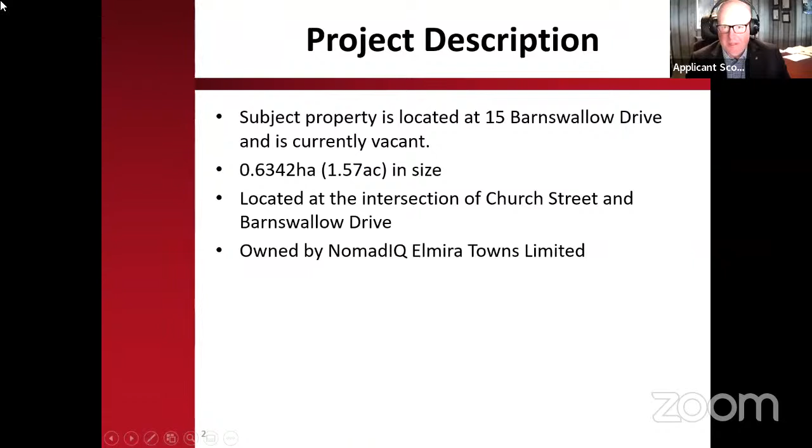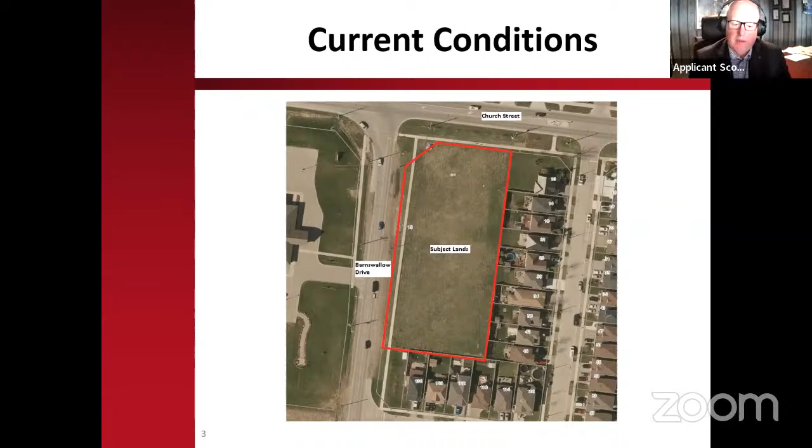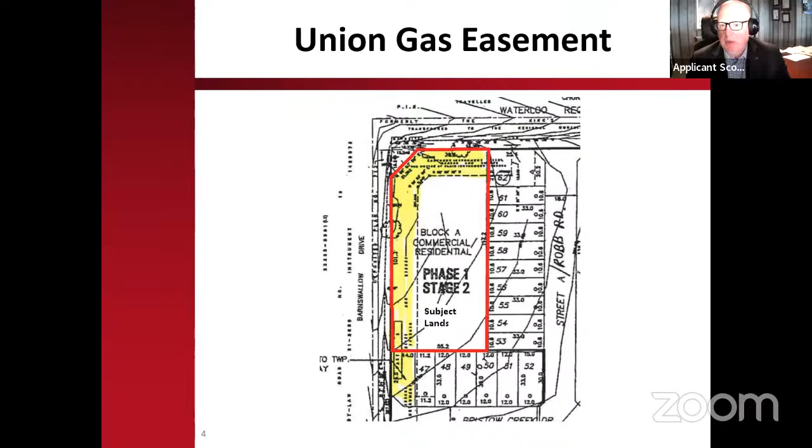Next slide, please. So again, the subject property is outlined in red. One of the biggest design considerations, or I'll call it an issue with this site, is the location of a Union Gas easement, shown in yellow on this image. It encompasses basically 50 feet of the property around the road perimeter of the site, able to put parking, driveway access, and things like that on top of the easement. But naturally, no building or permanent structure would be allowed in that area.

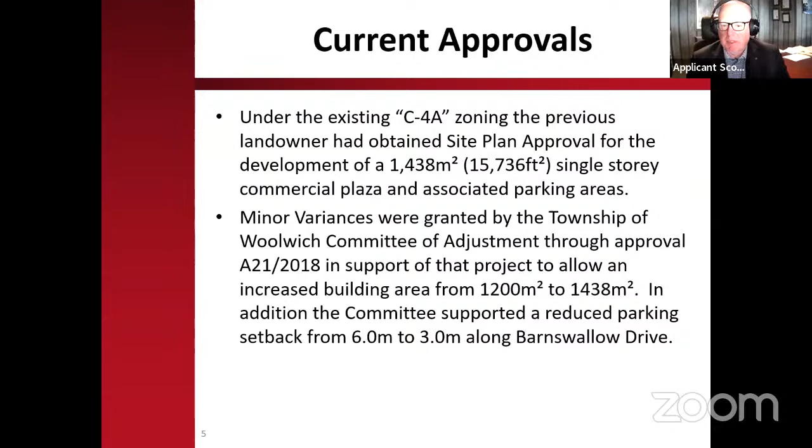Next slide, please. Under the existing C-4A zoning, the previous landowner had obtained site plan approval for the development of a 1,438 square meter single-story commercial plaza and associated parking areas. As part of that project, minor variances were granted by the Township Committee of Adjustment through approval A21/2018 in support of that project to allow an increased building area from 1,200 square meters to 1,438 square meters. In addition, the committee supported a reduced parking setback from 6 meters to 3 meters along Barnswallow Drive.

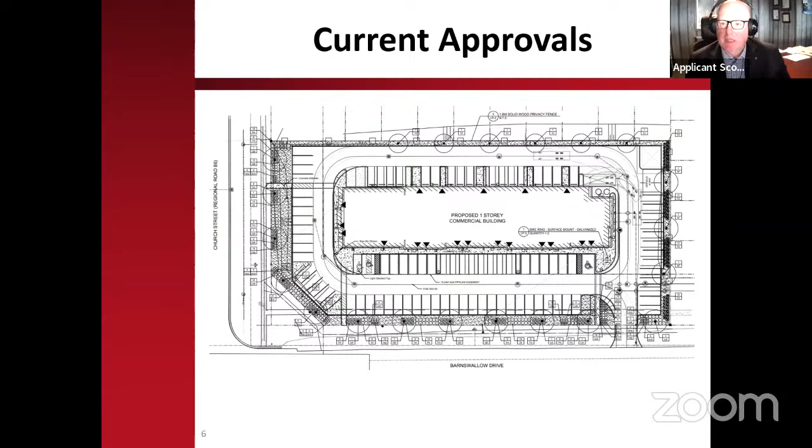As noted by Mr. Gundrum, there is permission in the existing zoning. Dwelling units are permitted above a commercial building under current zoning, so theoretically, meeting parking requirements, a second floor of dwelling units could have been added to this building. Next slide, please.

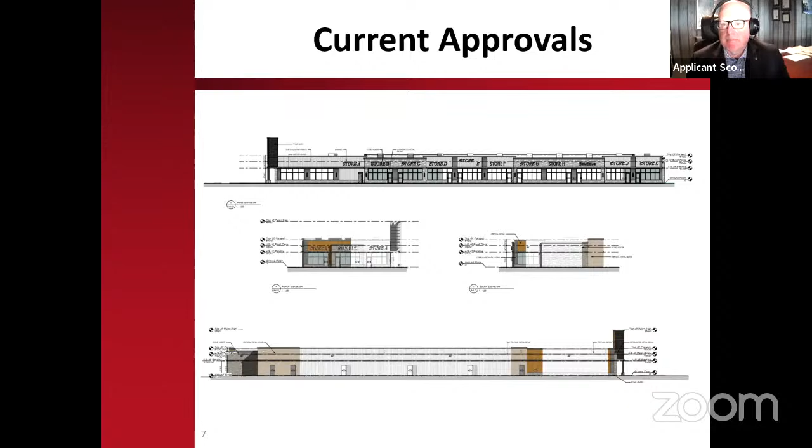As part of our proposal, an official plan amendment to permit an increased residential density from 60 to 81 units per hectare was submitted. The proposed residential complement of 51 units, being 45 stacked townhouses and 6 dwelling units, equates to a net residential density of 81 units per hectare.

Concurrently, a zoning bylaw amendment application to change the zoning from the C-4A with site-specific regulations to residential multiple design guidelines mixed-use R-7B zoning, again with site-specific regulations, was also applied for. This would facilitate the development of multiple and mixed-use buildings, and in particular permit standalone residential land uses in the form of stacked townhouses. Next slide, please.

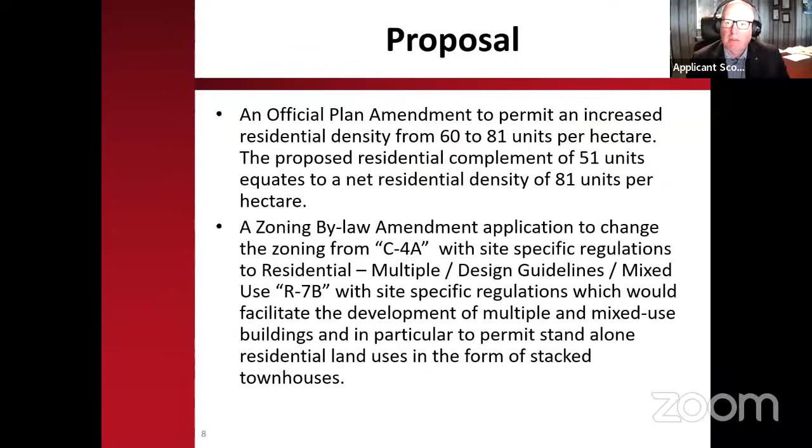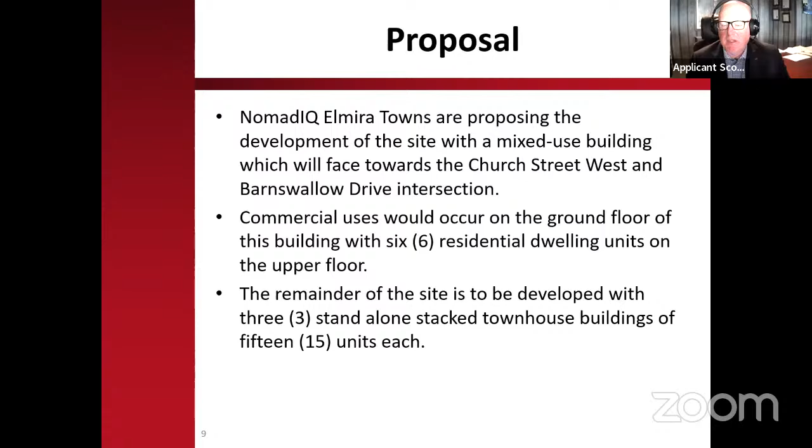NomadIQ Elmira Towns are proposing development of the site with a mixed-use building facing the Church Street West and Barnswallow Drive intersection. Commercial uses would occur on the ground floor, with 6 residential dwelling units on the upper floor. The remainder of the site is to be developed with 3 standalone stacked townhouse buildings of 15 units each. Next slide, please.

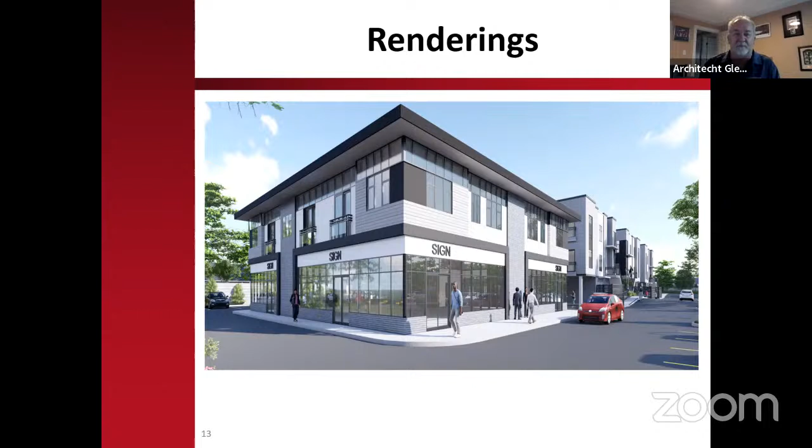So we are providing a clear demarcation, much different than what the previous proposal had with all sorts of horizontal commercial on it. Part of the reason for this is we're finding that the requirements for commercial establishments are getting fewer and fewer, especially with online buying and commercial establishments already being available within other pockets. So we're not going to completely disregard it, but we have reduced it so that we can still provide a facet of it within this development.

Next slide. So this is looking at the rear then—if kitty corner is on the far side, if you drive around the building, this is sort of from the back side. We do have a loading area underneath the building, which allows loading to be obscured from the street and allows the commercial developments on the ground floor level to be satisfied.

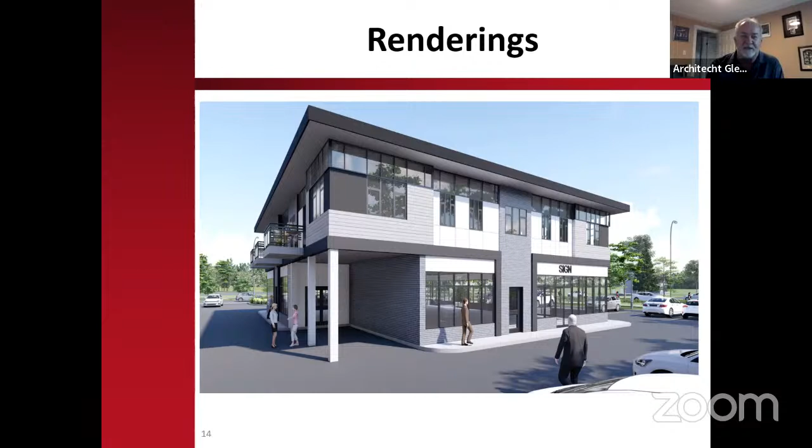Once again, sidewalks all the way around, perimeter parking all the way around. So the commercial establishment is on one side of the site with the mixed use residential above it.

Next slide, please. Now I'm taking you to the south end of the site, along Barnswallow. There is the whole driveway parking area that is running parallel with Barnswallow. This is the most southerly building, and this is showing the stacked townhouse.

Once again, the overall height of the building is not to exceed 10.5 meters. It is stacked, so each one of these blocks has 5 units per floor plate, 3 floors high, or 2.5 floors high, because the first floor is brought down in order to decrease the height value around the building and actually bank the berm into it. What we really want is a very walkable community where there's good social interaction between the sidewalks and the balconies and where people will be, so that it's an active community.

This was really inspired by the developers, who are looking for a live-work place where people can establish themselves out of the Kitchener-Waterloo area. They can work from home, have their own establishment, have commercial just down on the same site, but actually live and enjoy the environment. So even the unit designs have not only bedrooms, but actual working offices in them, because it's the live-work-play concept, which was very important to the developer on this site.

You can see that we've tucked the parking nice and easily off of the main access driveway, but it's tucked underneath the building so that we can reduce the interactions between pedestrian and vehicular traffic, and provide a nice living environment without having the cars within that environment.

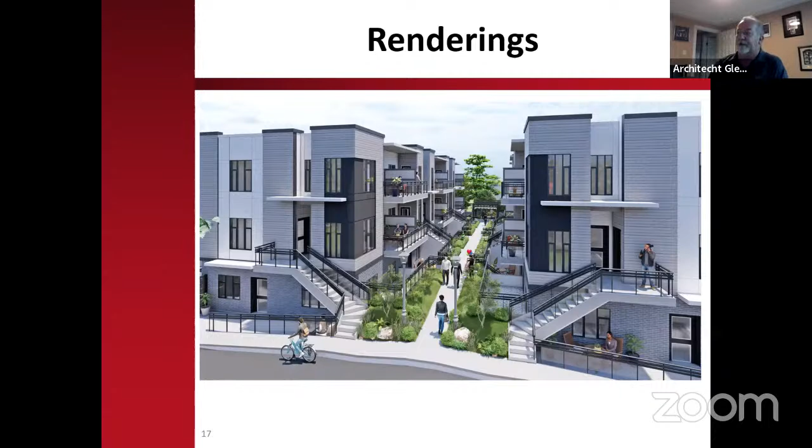Same elevation, pulling up a little bit more so you can see the extent of the walkways. The walkways run in between the buildings and back along the rear side of the buildings, giving a total walkable site around each residential unit, and once again providing people their own space on a balcony area or even ground-related.

This gives more of a pedestrian scale as you walk along in between that space. The units face into each other rather than looking over the neighbors, but inwards towards themselves. That's really been the focus in designing this residential development, which is supporting the commercial on the corner.

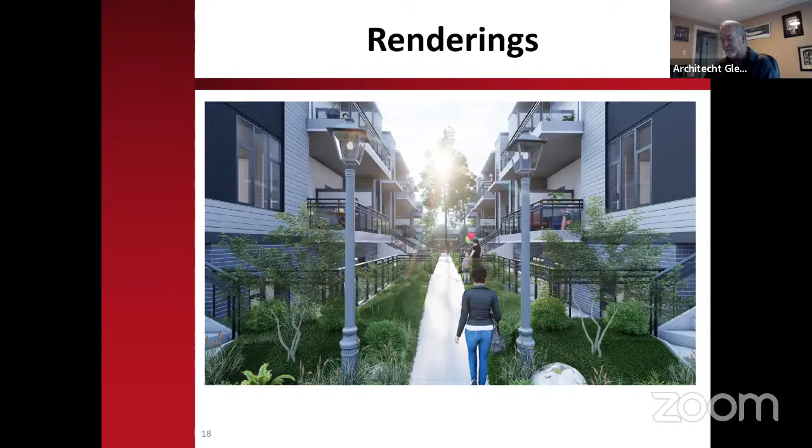That was the last slide. Yes, that leaves it back to you, Scott. Thank you, Glenn.

With regard to the applicable policies, regulations, and legislation, the proposal is consistent with the Provincial Policy Statement 2020. It conforms to the Region of Waterloo Official Plan and the Township of Woolwich Official Plan, save for the increase in density. An official plan amendment is not needed to add residential as a permitted use, since that's already allowed. The residential component is really just an increase in density from 60 units per hectare to a maximum of 81 units per hectare. The proposal follows the commercial uses already allowed under the C-4A zoning, with no additional commercial uses being sought, and site-specific permissions under the R-7B zoning would allow the stacked townhouses and implement the project.

In support of the application filing, we submitted a variety of supportive reports, including an archaeological study, traffic impact study, functional servicing report, noise feasibility study, truck movement plan, and salt management plan. These are all with township and regional staff right now and are currently being reviewed, and will assist in formulating the staff report and recommendation for the proposal.

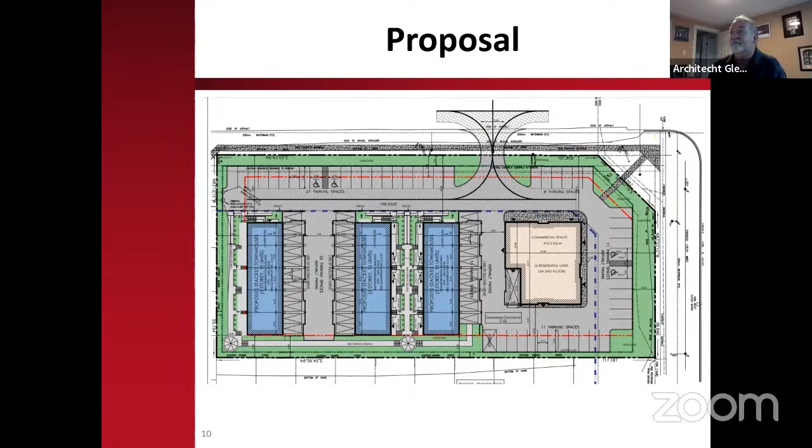Yes, I understand that, and that sounds very nice. What I'm getting at is how much green space should a development like that have? It seems like there's not enough, just looking at it.

Okay, thank you. Could I have one more question, Chair? Thank you. And that is, could you talk a little bit to the clientele that you're hoping to attract to this kind of development?

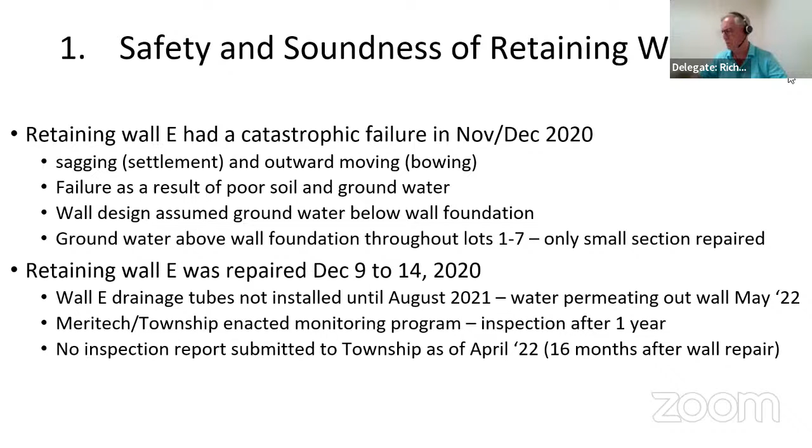Okay Jeff, are you going to speak with this one? I did, sorry, next slide. So I just kind of, again, we don't, yeah. I think the background on the safety and soundness of the wall has really heightened the issue for all of us.

What it brings about is a deeper dive into what the liability related to this is. As communicated to us by the township in a meeting we held with Jared and others on May 3rd, the township's perspective is that the retaining wall is owned by the residents of lots 1 to 7, and as such they are responsible for maintaining the wall located on their property.

We've looked into various measures to provide some level of protection for the risk that this exposes us to, and home insurance does not cover retaining wall repairs that are caused by soil and water conditions. This really leaves an exposure that we've become quite concerned about. As we've communicated, insurance companies would have developed coverage for this type of risk if it was a common one. That coverage does not exist.

I'm also going to walk through what the purchase and sale agreement says with respect to the retaining wall versus the township view that's being presented to us. Next slide, please.

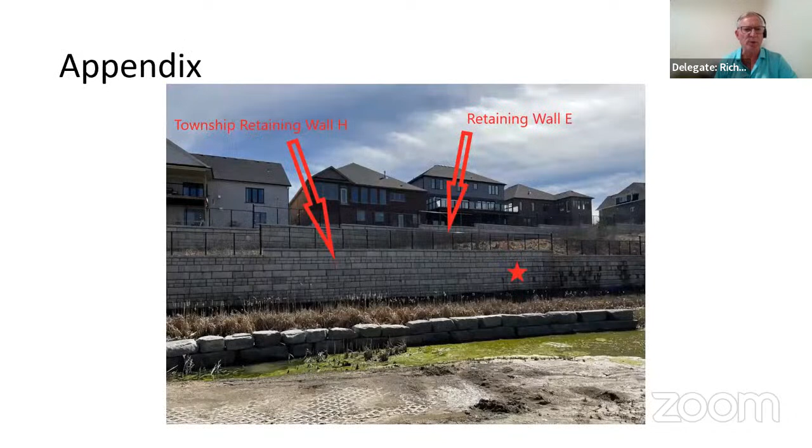So I go through all of that from the perspective of liability issues. I think there's scope for challenging that. But more importantly, the retaining wall has been seen to be unsound, and we are concerned about the potential liability falling on our shoulders of $20,000, $200,000. We really don't know. But it might not be just 20,000 — it might be 20,000 multiple times. And I think for the township and for ourselves—